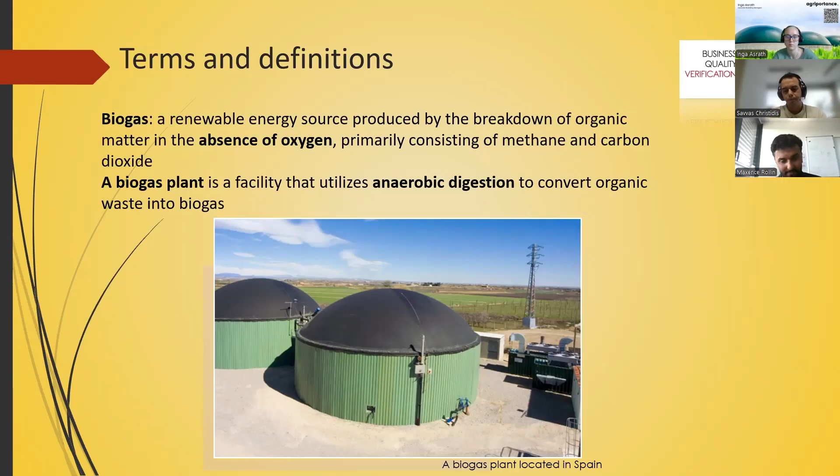So, biogas plants: we have a considerable amount of factories today in Greece which have the potential to be upgraded or be in a hybrid operation with a biomethane plant, which is exactly as it says, the upgrade of biogas to biomethane with the intention of injection of biomethane in the natural gas grid or for other kinds of usages.

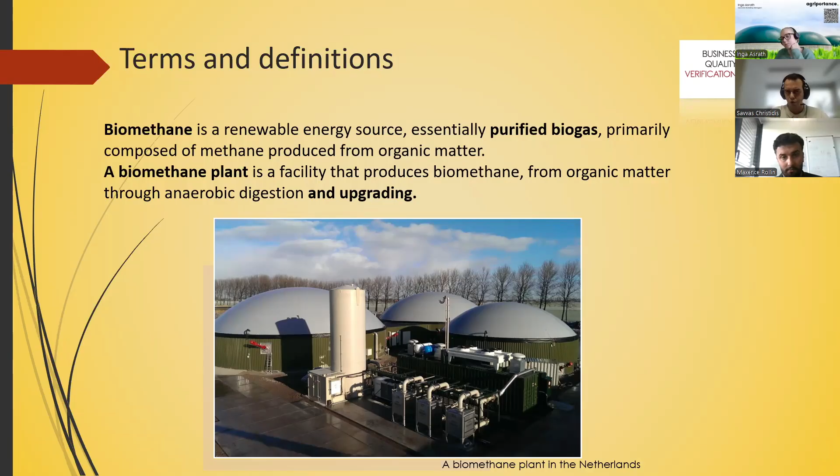For example, we have a stage which is optional. This kind of factory can also be found in Europe: liquefaction plants, in which we take the biomethane and produce bio-LNG in liquid phase.

This is basically an energy-consuming process in which we process biomethane for bio-LNG production, whose final product is in liquid form, which can be used for other logistic reasons other than injection in the natural gas grid. This can be transported by ship, and so on and so forth, for other uses.

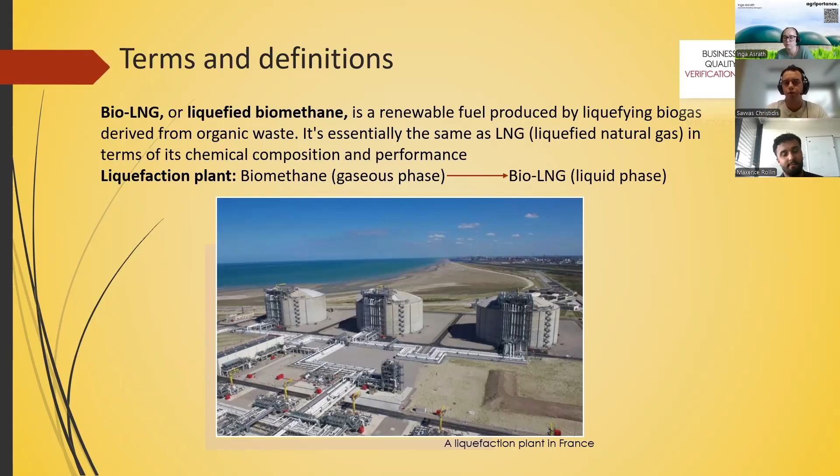Now, a short note here. All the previous plants are RED certified, and of course one plant can have all three kinds of operations. A biogas plant can also have a biomethane plant connected and also be a liquefaction plant, and all be under RED certification.

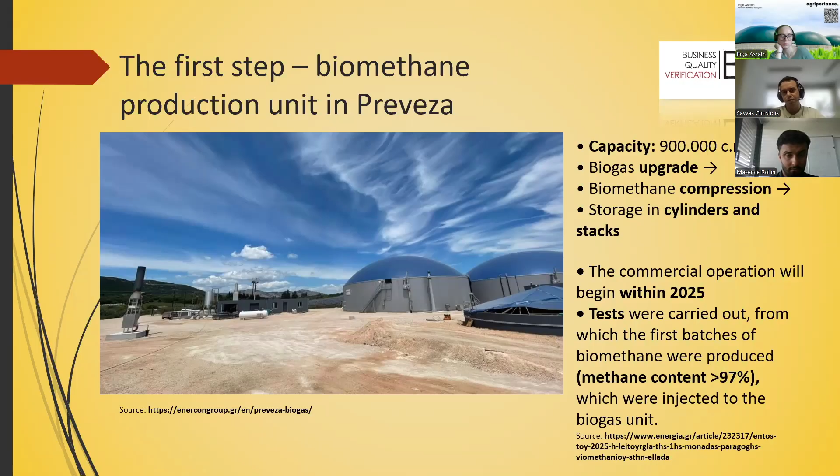So all in all, we can say that we are in a very primitive stage. The legislation was set actually 1 month ago. But we can say that the first step is taken quite early, and so the potential is there. We expect to see how things will turn around in the near future.

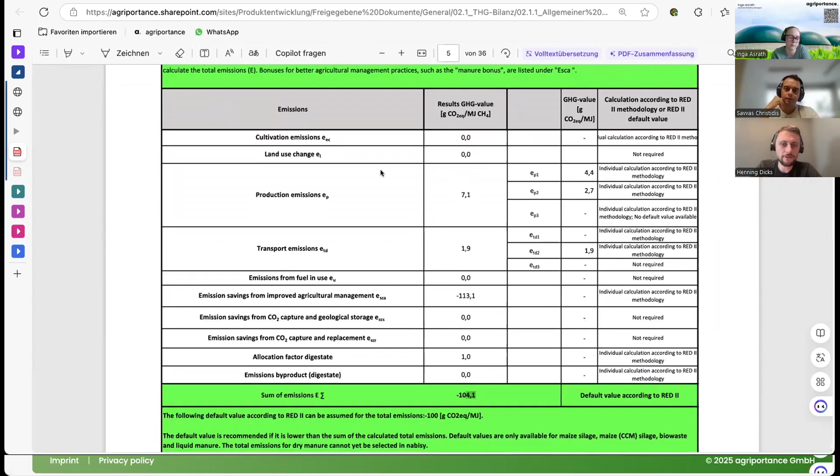And with this management summary, we're creating out of our software either a blue POS from ISCC to transfer the blue POS to an off-taker or to a biomethane trader, or we can directly connect to the Nabisy program, for instance, to export the different POS via Nabisy from our software solution.

Maybe to give you a small flavor of the future perspective: when the UDB is up and running, we will also have a connection so that the data which is required for the UDB, for instance, the different deliveries and so on, can directly be pushed to the UDB. We also had a small test phase there to have everything in a proper way, but the UDB is not ready yet, so we still wait for it. But this is also something our software can do, not only to have this connection to different POS systems, but also to the UDB in the future. Yeah, and that's what we are doing here.

And it's also a good solution for Greek producers, but also for other producers all over Europe who want to get this important REDcert or ISCC standard, and also to act with less certification risk, to be aligned with what the European Commission wants, and also, of course, to optimize on this CI-based system, because this is also important for the market, which I want to talk a little bit about in the next 5 minutes.

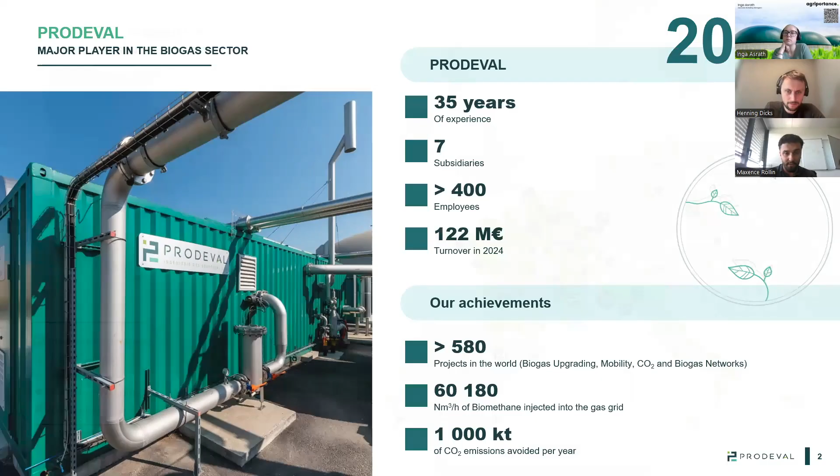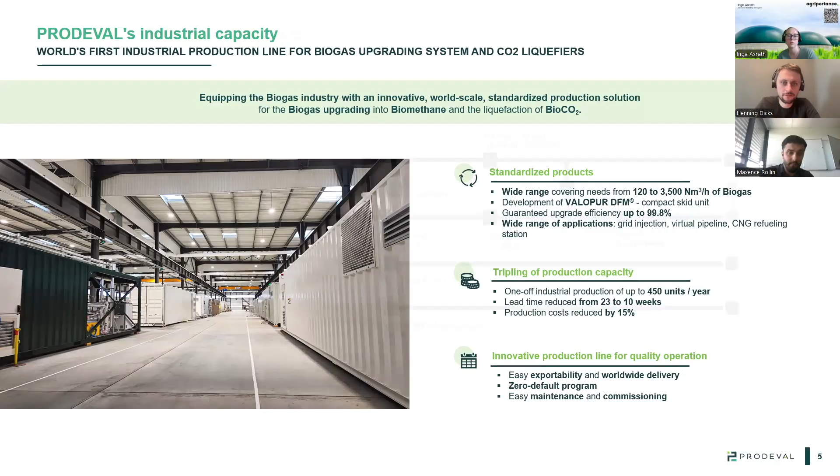So we have spoken about the methanization. Just a quick reminder on this part. So you have the anaerobic digestion, the digester. On this part, you have 50% CH4, 50% CO2, in order to simplify the explanation. You have, for sure, humidity. You have pollutants, could be different from the feedstock that you will use. Some will create VOCs, some will create H2S.

So as a first step, we need to have a pre-treatment on this biogas. So we supply a first unit, the name of this unit is Valogaz. It's a drying and cooling unit in order to separate the liquid from the biogas, so to remove humidity and to create a small pressure. After, we go to the activated carbon filters, we will use some different activated carbons depending on the pollutants that we can have from each site.

And after you have several kinds of valorization possible for the biogas, you can go directly to the upgrading unit, so 3-stage membrane, after you've done the odorization, and you can inject into the grid. If it's classic grid with classic pressure, I mean, you don't need to have a booster. If tomorrow you want to inject on a transport pipeline, you will need to install another compressor, and the name of the compressor is booster of biomethane, in order to achieve, depending on the country, 70 bar G on injection point, or 80 if we take the example of Spain.

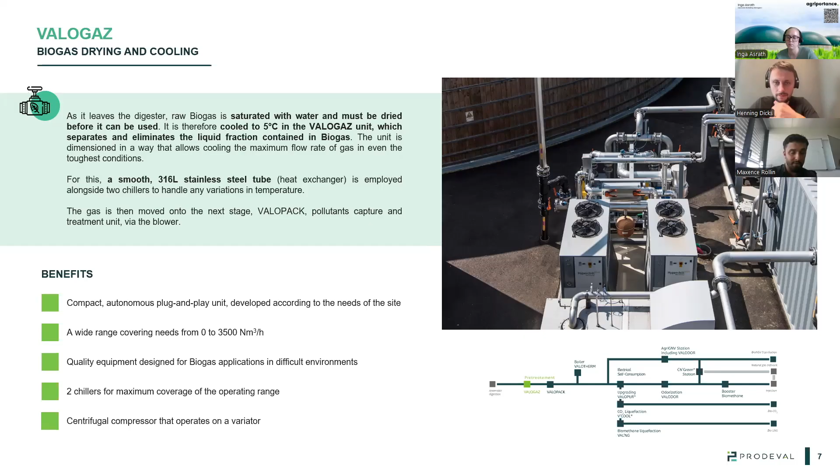Here you can see the VALOGAZ that we supply, our drying and cooling unit. We cool the biogas to around 5 degrees, and after this unit you have a pressure around 150 millibar G, then it goes to the activated carbon. With activated carbon, you always have 2 tanks with activated carbon inside. Some are specialized to eliminate H2S, because you have oxygen in the biogas - when it comes to this activated carbon, the oxygen permits fixing the H2S inside the activated carbon, if you use good references. And depending on the pollutants, we will also complete or replace with activated carbon specialized for VOCs, mainly if you use bio-waste, some typology of bio-waste.

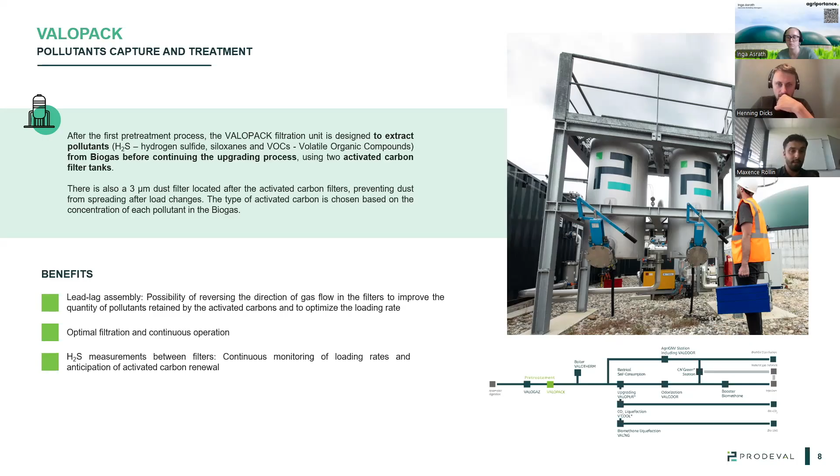We have our VALOPUR. In terms of efficiency, it has 3 stages of membrane. Today, what's important to keep in mind is that with this technology, compared to CHP, you can play very easily concerning the exploitation of this plant. On standard, the efficiency of the plant is 99.5%, to be conform to RED II and to not exceed 0.5% CH4 release to the atmosphere.

In some countries, like Germany, but this won't be the case from what we understood about the Greek market, this target of methane in atmosphere could be lower - some countries like Germany will ask to not exceed 0.2% CH4 release in the off gas. So with a 3-stage membrane, if you add a membrane and play on the operation, you can achieve more or less 99.8% efficiency.

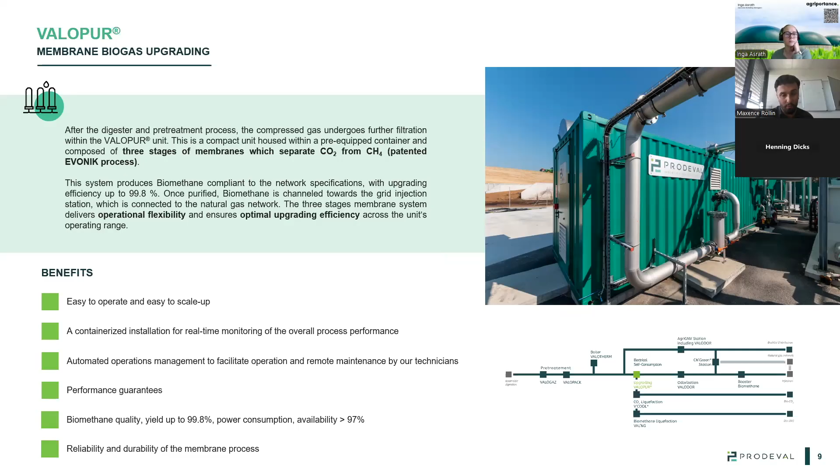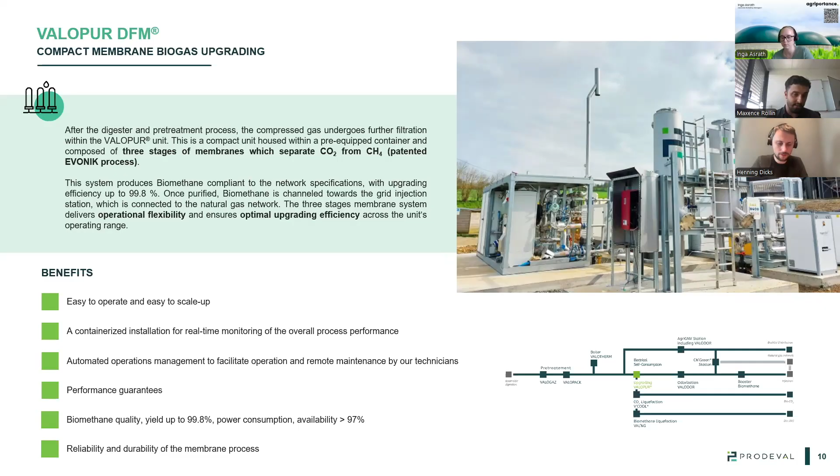So we have this VALOPUR. We have also developed a technology with exactly the same 3-stage membrane, but a very compact upgrading unit that could be useful in the Greek market, because some sites will already have CHP on site. If you want to increase capacity, in any case you need to deposit a permit for a new installation, but sometimes the space available on site is not very huge. So for this case, we have developed a solution specifically to be as compact as possible - it's exactly the same efficiency, same technology as the previous slide we saw together.

In terms of business plan, if you want to be on par with membrane technology, your site needs a flow around 3,000 cubic meters per hour of biogas, so a very huge plant. We don't have a lot of sites like this in the Greek market, and the electricity price needs to be around 200 to 220 euro per megawatt. I know that's approximately the price in Greece, but in any case, the site isn't huge enough to use this kind of technology. So membrane will be the good technology for methanization plants in Greece.

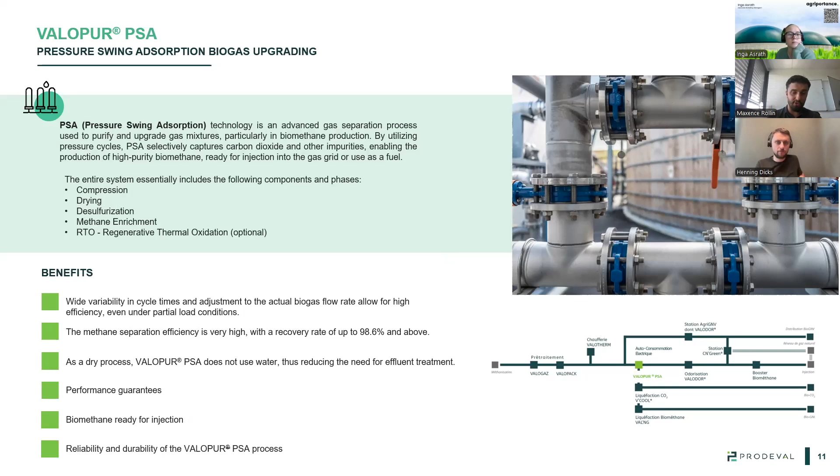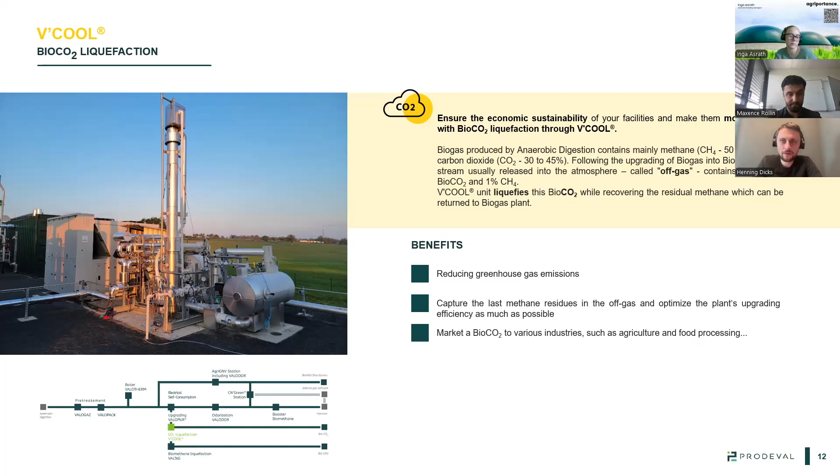Now we can speak about the Greek project we have delivered, so it's a case study. Today we work with DEPA company. I think a lot of people on this webinar know DEPA very well, because it's a well-known company in the Greek market. They are the operator of the grid, the biggest one in Greece. Once again, thanks to DEPA for the trust in this project. We are very proud to work with a company like this.

Farma Chitas is a site located in Filipiada, on the northwest coast of Greece, west of Athens. We did the commissioning and what we call the performance test in week 25 of this year, which was mid-June. In this test, there was no trouble with the quality of biomethane, no trouble with the flow rate. We can say this project will produce at nominal flow 140 cubic meters per hour of biomethane, with a global efficiency of 99.5%. But like I explained before, you can adjust this data as you want; it's an exploitation choice.

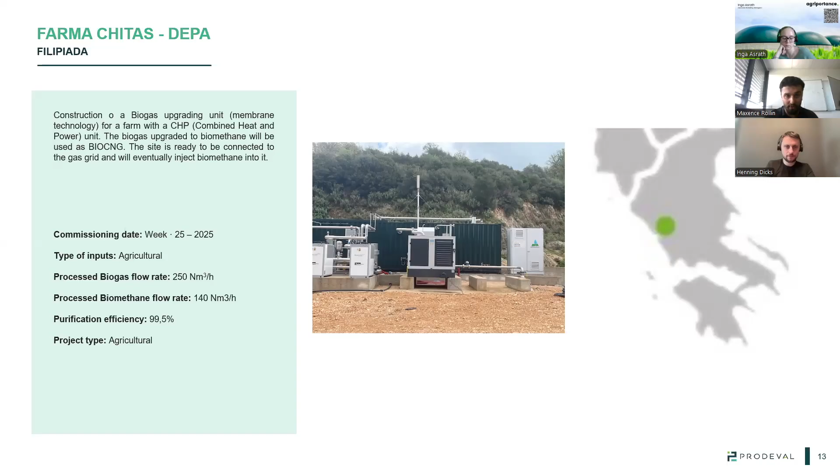For this plant and all the plants we've seen together, what's very important is services, because every plant is able to produce biomethane, but what's really important is availability and maintenance. So we invest a lot in the maintenance part. We truly believe that today it's our added value on the market. We have 20 on-liners speaking 5 languages, not yet Greek -- there will be if we have 10 projects on the market, more or less. So today they speak English. It's on-line every day, every hour.

Because on this kind of technology compared to CHP, we have a lot of instrumentation -- it's our standard, our design. Today we're able to restart 95% of the plants at the first call and remotely. You don't need to have a technician physically on site to change something, because most of the time we're able to play with parameters and very quickly see the problem with our on-line system.